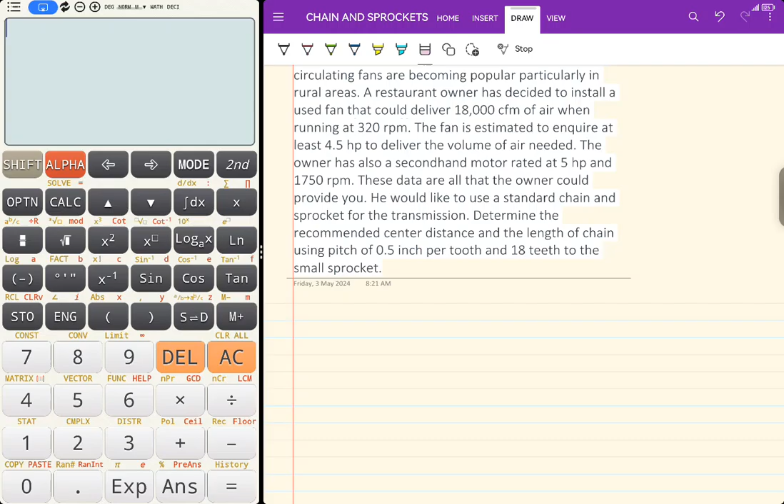So ito, sample problems for chains. So ito yung first problem. Due to high cost of electric power, ang haba ng problem na to eh. High maintenance cost and high investment of air conditioning units, air circulating fans are being popular, particularly in rural areas.

A restaurant owner has decided to install a used fan that could deliver 18,000 CFM of air when running at 320 RPM. The fan is estimated to require 4.5 HP to deliver the volume of the air needed. Ito yung mahabang problem eh. Kaya sa board exam, ginagawa nila plug-and-plug na lang. But not necessarily like that. You just need to read between the lines. Maikli lang tong problem na to.

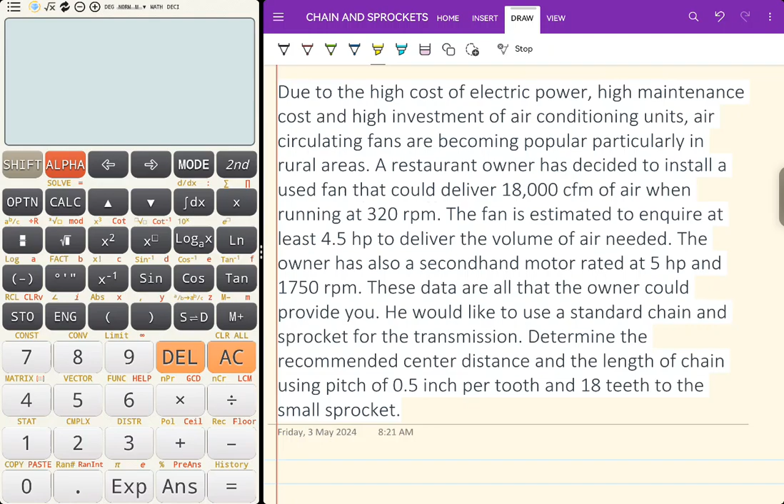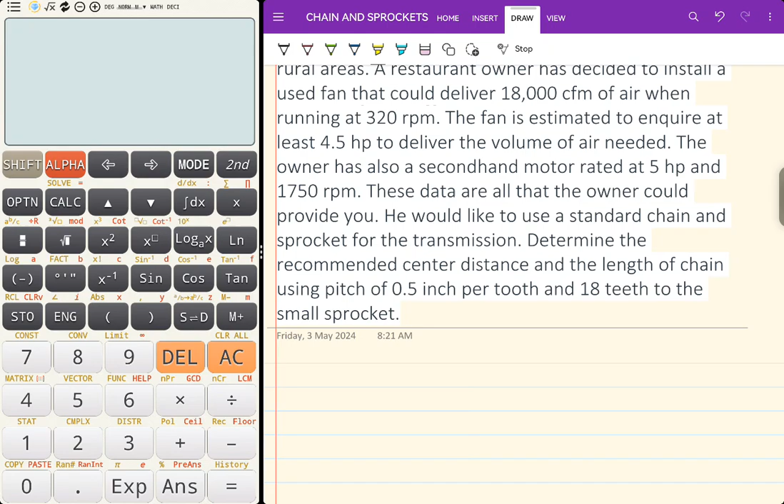So, the owner has also had a second-hand motor rated at 5 HP and 1750 RPM. So, these data are all the owner could provide you. He would like to use a standard chain and sprocket for transmission. Determine the recommended center distance, yung hinahanap. Recommended center distance. Okay. So, recommended center distance and the length of chain using pitch of, bigyan ka ng pitch dyan na 0.5 inch per tooth.

So, pitch 0.5 inch per tooth. So, yan yung gap between each chain, yung pin. Okay? Yun yung gap. So, yung driving chain mo for the small sprocket, that is 18T. Hindi siya diameter of the small sprocket. Teeth of the small sprocket, that is 18T.

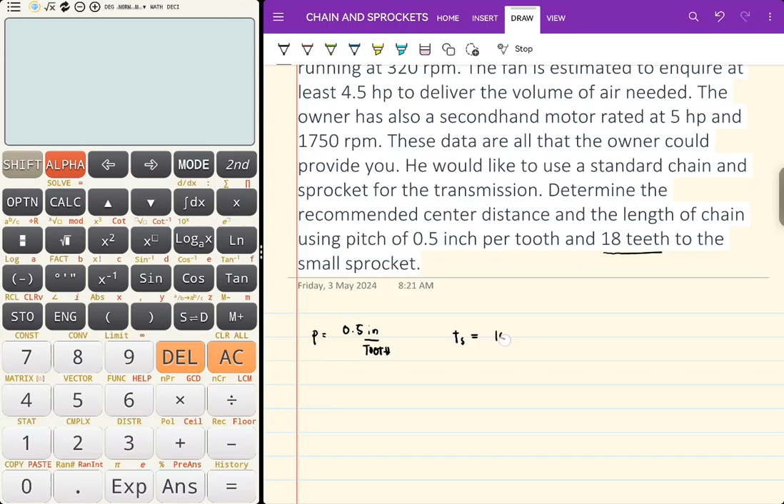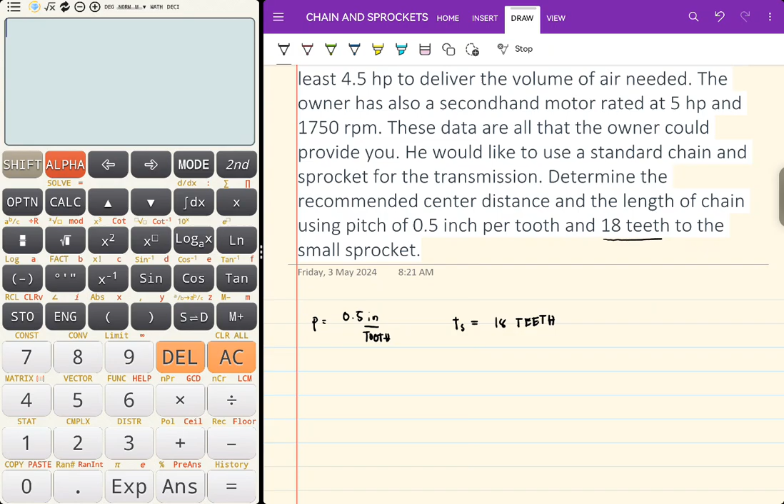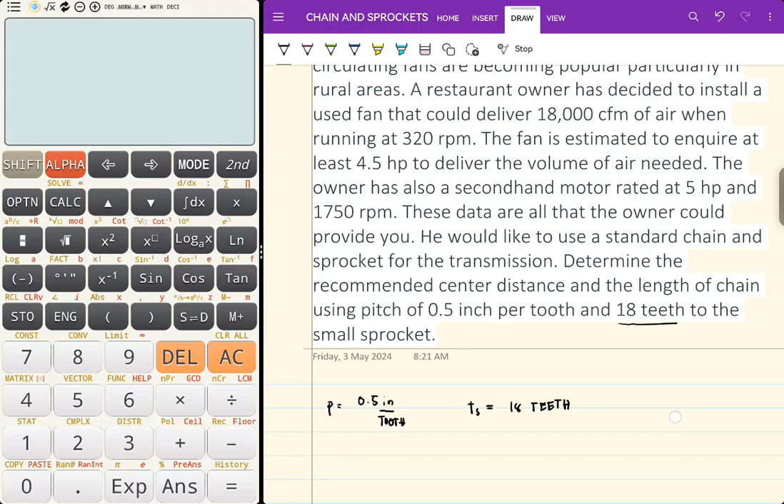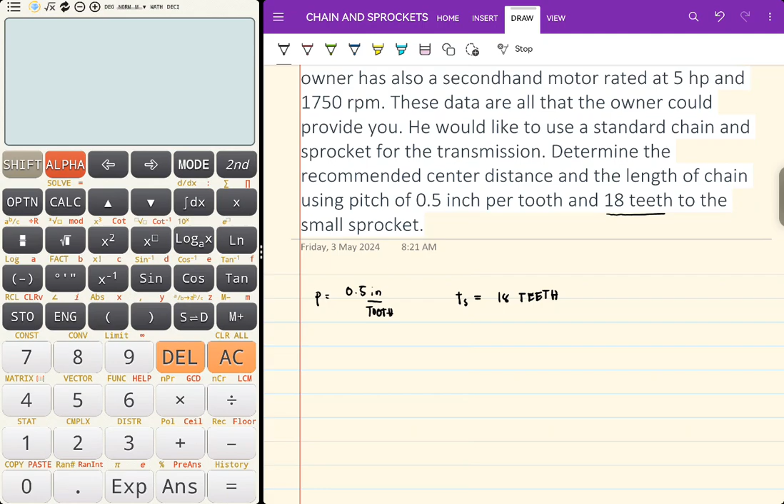Sir, paano natin mahahanap yung mga recommended natin dito? Take note of the following. Yung motor na gagamitin is 1750 RPM. Ngayon, ang kailangan mo is a fan that will run at 18,000 CFM tapos rotating at 320 RPM. So, meron tayong given dito. Always the smaller sprocket will turn more than your bigger sprocket. So, definitely, ito yung NS.

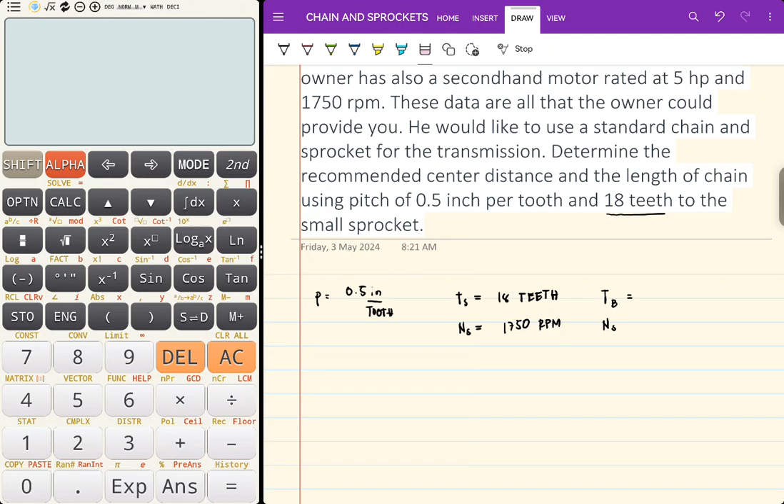The smaller sprocket, meron kang 1750 RPM. And then, wala kang teeth for the bigger sprocket, meron kang N for bigger sprocket. So, NB. This is 320 RPM. Ang hinahanap sa'yo dyan is the what? Center distance and the length of the chain. Balik tayo dito sa mga discussions natin.

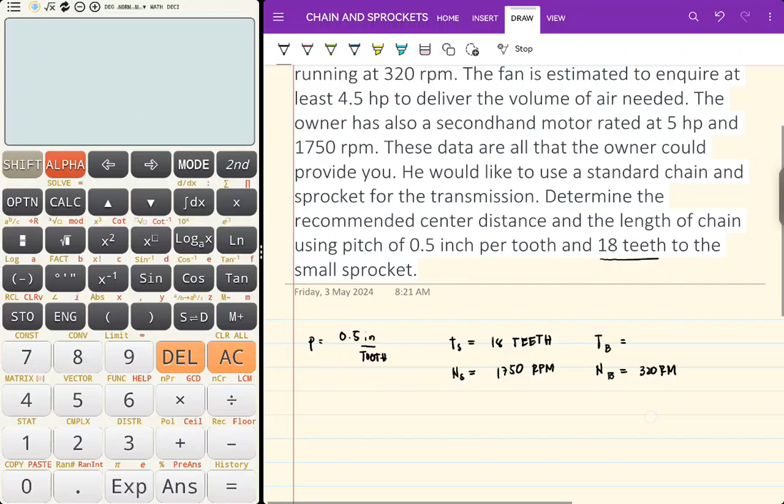Okay. Ito yung formula natin pagdating ng length of the chain. For the length, makuha mo dyan the length in pitches. So, you have to multiply it with the number of pitches. Kasi in pitches din yan. Gagamitin mo kasi yung teeth. Pag ginamit mo yung teeth, yung ngipin ng sprocket, dun sa chain, ang haba niyan is in pitches. So, inch per tooth yan. So, you need to multiply it with the number of pitches pa.

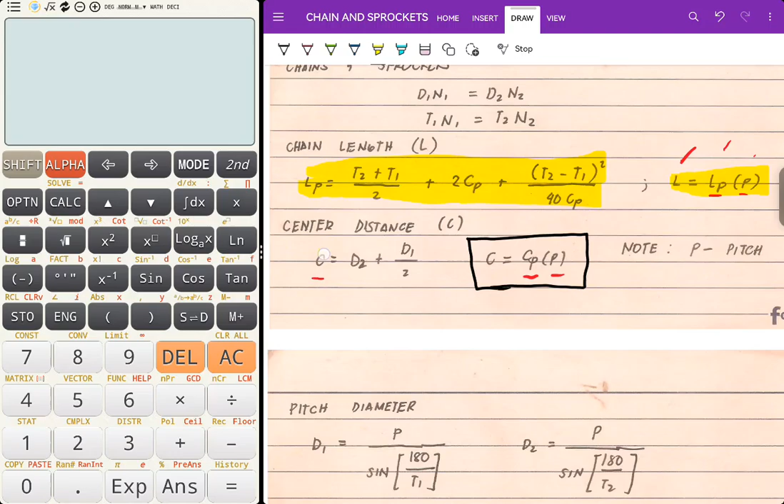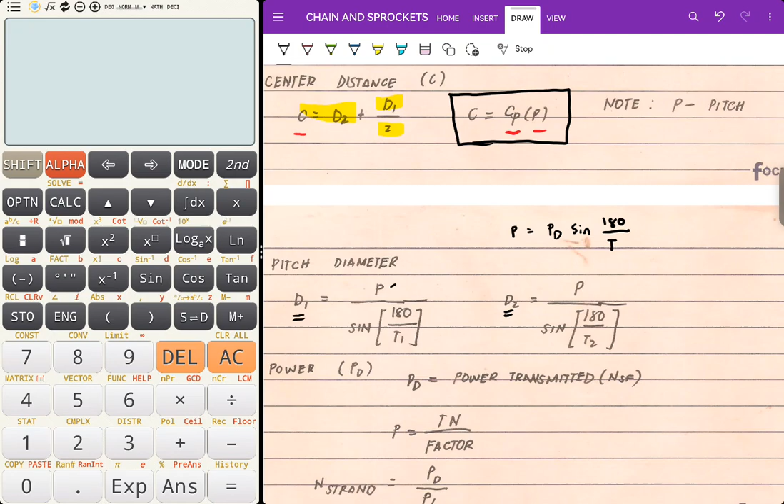Okay? So, on the center distance naman, gagamitin mo yung kanyang diameter. Diameter ang gagamitin mo dyan. Tapos, in order for you to get the pitch diameter, pitch is equal to pitch diameter multiplied to sine 180 divided by the number of teeth nung kinukunan mo ng pitch. Either the smaller diameter or the bigger diameter. So, pasok natin dito sa calculation.

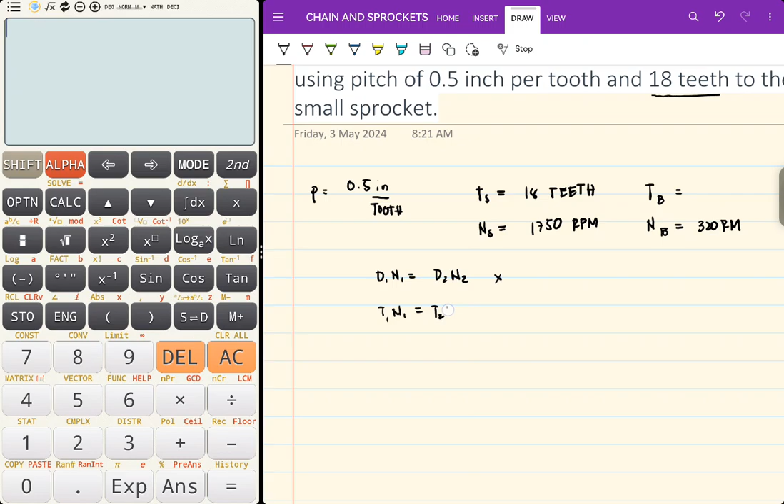Okay, first, hanapin natin yung NB. D1N1 is equal to D2N2. Pero ang pinag-uusapan natin is yung number of teeth. Kaya wag mong gagamitin ito. Ito ang gamitin mo: T1N1 is equal to T2N2. Ang hinahanap ko dyan is yung number of teeth ni 2. So, T2 is equal to T1N1 divided by N2. So, 18 teeth times N1, which is 1750 RPM, divided by 320 RPM. Cancel same units. 18 times 1750 divided by 320.

So, yung bigger sprocket mo, hindi pwedeng 98. Kasi pinag-uusapan natin dyan ngipin. Diba sa tao, ayaw mo ng bungi? Tama ba? So, 98.44 teeth. Approximately, this is 99 teeth. So, for further calculations, ang gagamitin mo dyan yung actual number. So, hanapin natin ngayon yung mga diameter nila.

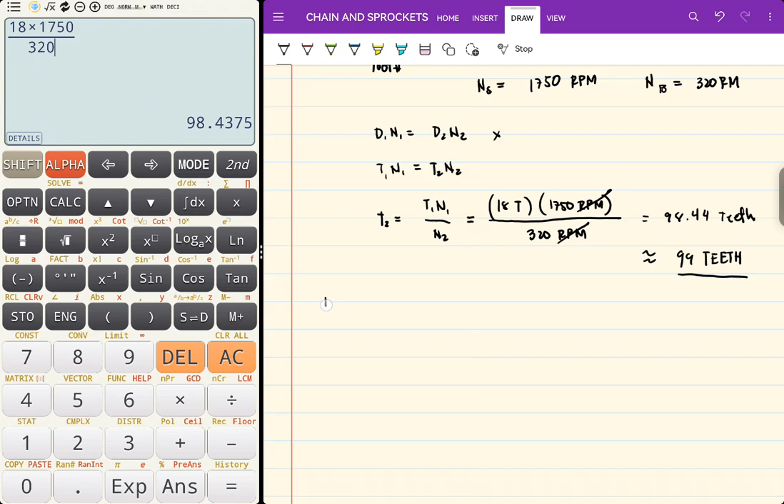The pitch diameter for the smaller sprocket will be yung pitch divided by, tandaan nyo, hindi nagbabago ang pitch, yung size lang ng sprocket. Kasi pag nagbago yung pitch, hindi na yan papasok doon sa inyong sprocket. So, this is sine 180 divided by number of teeth nung una, that is 18. So, 0.5 inch per tooth divided by sine 180 divided by 18. May tooth ka na dito sa baba, makakancel na lang yung tooth. Inch na ang lalabas dyan.

Ito, denominator. Makakancel talaga yan. Okay? So, this will become 0.5 divided by sine 180 divided by 18. So, 2.8794 inch.

Yung D2, that is, yung pitch natin, 0.5 inch per tooth, divide by sine 180 divide by 99 teeth. Okay. Uguin ko na lang yung nasa ibaba dyan. So, 99. This will become 15.7590 inch. Okay. We now know the center distance.

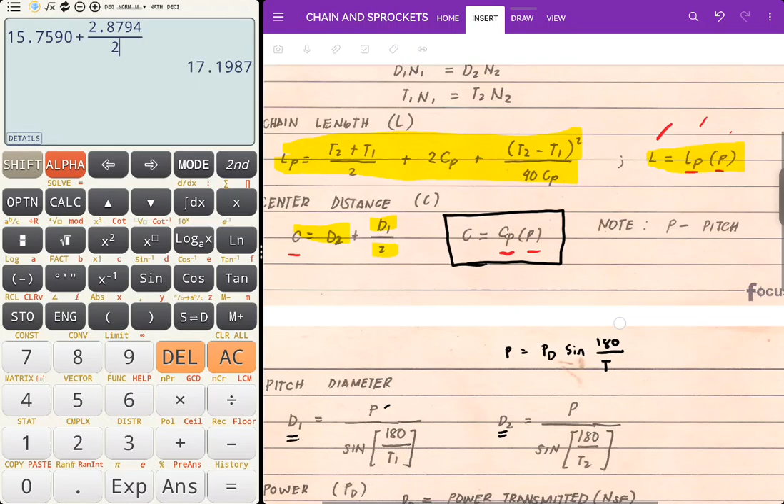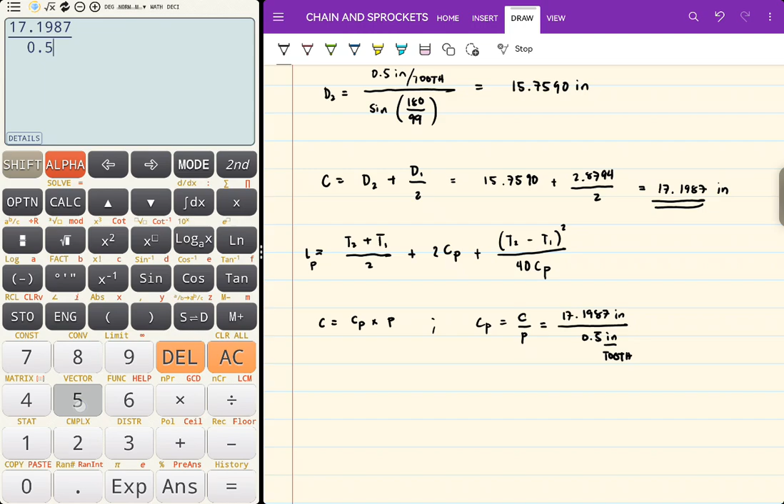Okay. Mali. Okay, na-update ko na lang yung mga turo natin. Hanapin mo muna si center distance yung may pitches. Diba, C is equal to CP times the pitch. Hanapin mo si CP, length of pitches. So, CP is equal to C over P. So, that is 17.1987 inch divided by 0.5 inch per tooth. Dapat lahat naka-teeth. So, 17.1987 divided by 0.5. This is 34.3974. Cancel yung inch tooth na to.

Eh, sir, number of teeth. Pag number of teeth, dapat yan sakto. So, gawin natin tong 35. Okay? So, for the length of the pitch, number of teeth tayo. 99 plus 18 divide by 2 plus 2 times CP mo, 35, plus 99 minus 18 squared over 40 times 35. So LP, number of teeth to lalabas. So 99 plus 18 divided by 2 plus 70.

Yan na, mag-MDAS ka na. Simplify mo na pag kaya na ma-mental. Plus 99 minus 18 squared divided by 40 times 35. So that is 133.1864. Okay? Teeth ito. Pwede na yan. Pasok ko na dito para makuha ko yung length of the chain.

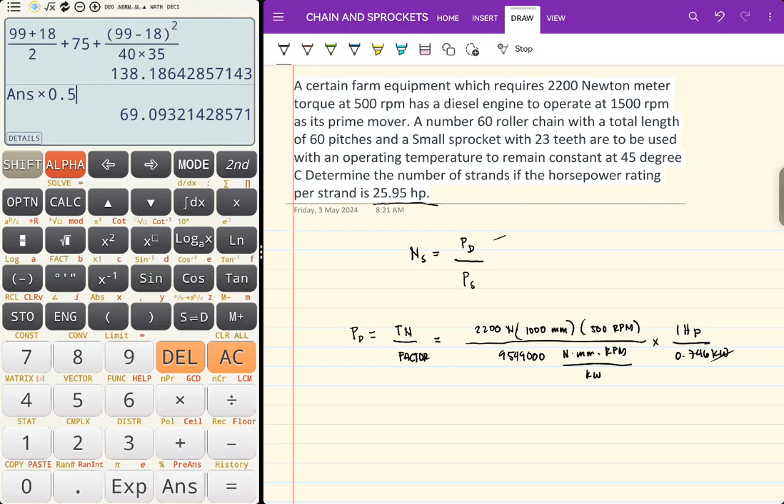Divide by 9,549,000 Newton millimeter RPM every kilowatt. Ang kailangan ko HP, times 1 HP every 0.746 kilowatts. Cancel same units: kilowatt, RPM, mm, Newton. Ang lalabas HP. So, PD.

Okay, calculate natin. 2,200 times 1,000 times 500, divide by 9,549,000, times 0.746. So, that is 154.4173 HP. Ito yung power that will be carried by

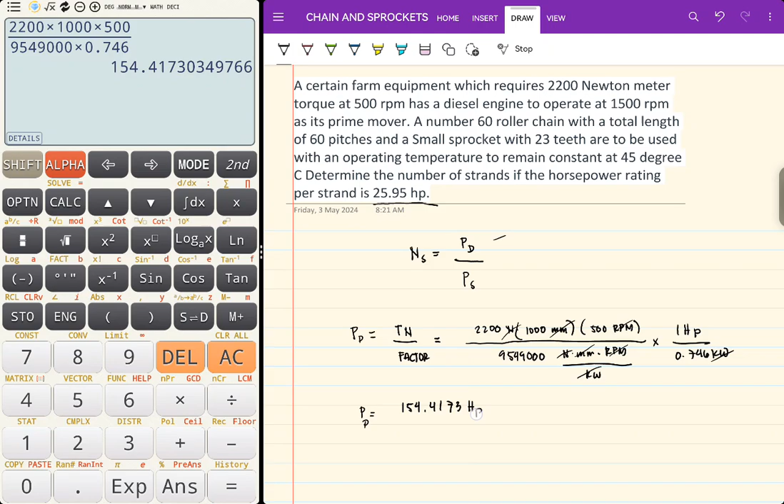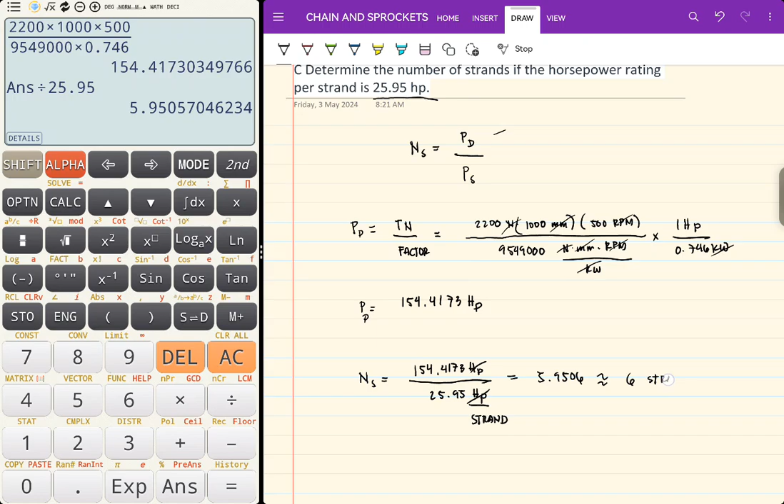the strands. Okay? So, for the number of strands na gagawin mo sa chain mo, the power developed is 154.4173 HP divided by 25.95 HP per strand. Cancel same units. So, divide natin to ng 25.95. So, ilang strands? 5.9506. Approximately 6 strands. A basic problem.

So, next problem. A 4-inch diameter shaft is driven at 3,600 RPM by a 400 HP motor. The shaft drives a 48-inch diameter chain sprocket having an output efficiency of 85%. The output force of the driving sprocket and the output power of the driven sprocket are... So hinahanap dito yung force on the driving sprocket, tapos yung output power of the driven sprocket.

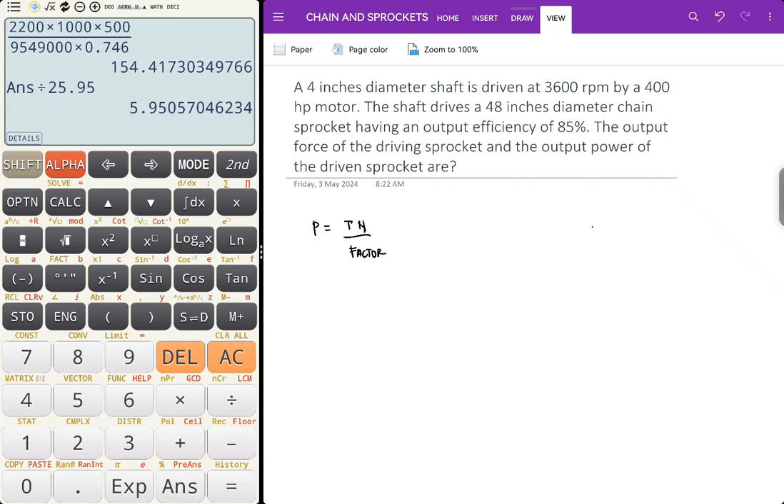So hanapin muna natin tong isa. Kailangan ko dito, meron akong N, check. Meron akong 400 HP motor. So paano yung sa driving sprocket, yung force niya? Di ba power is T N over factor? Tapos, recall nyo that your torque is equal to force times diameter nung pulley or sprocket divided by 2. So, power is equal to force times diameter nung driving pulley divided by 2 times N divided by factor.

Ang kailangan ko is the output force. The shaft drives a 48-inch diameter chain. Kaya lang, meron pa ako dito, mababawasan pa yan. May efficiency yung sprocket mo. So, the efficiency is efficiency ng sprocket. Multiply siya. So, pag transmit na 400 HP ng motor, hindi na yun yung maitatransmit ng sprocket mo. Mas mababa na, kasi meron kang efficiency.

So, force of the sprocket, that is power times factor times 2 divided by diameter ng pulley, N times efficiency ng sprocket. So, this is equal to 400 HP. Yung factor natin, 63,025 pound inch RPM every HP, times 2 divided by diameter, that is chain sprocket 48 inches.

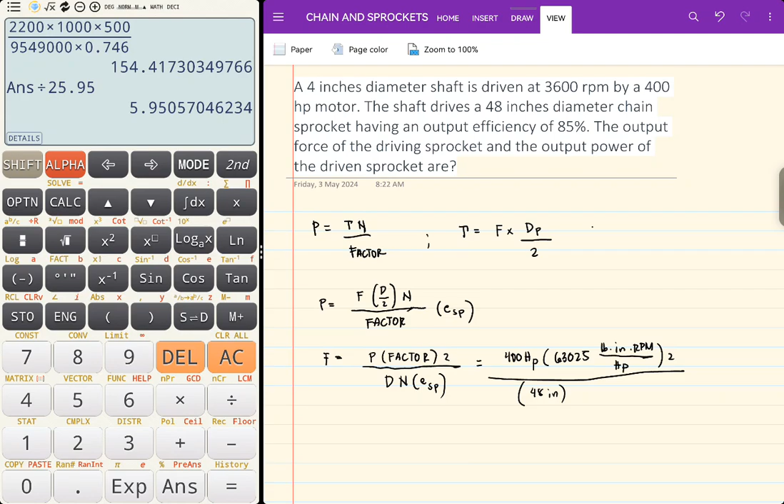Tapos N is... wala pa yung N nung sprocket mo. Bakit, sir? Tandaan nyo, ang equal lang sa kanila ay yung torque. Yung torque ng shaft is equal to the torque ng sprocket. Yun lang ang equal, pero hindi equal yung kanilang speed. May diameter ka dito ng shaft, N of the shaft, tapos meron kang diameter ng sprocket, N ng sprocket. So, hanapin mo ngayon yung N ng sprocket, kung paano siya umiikot.

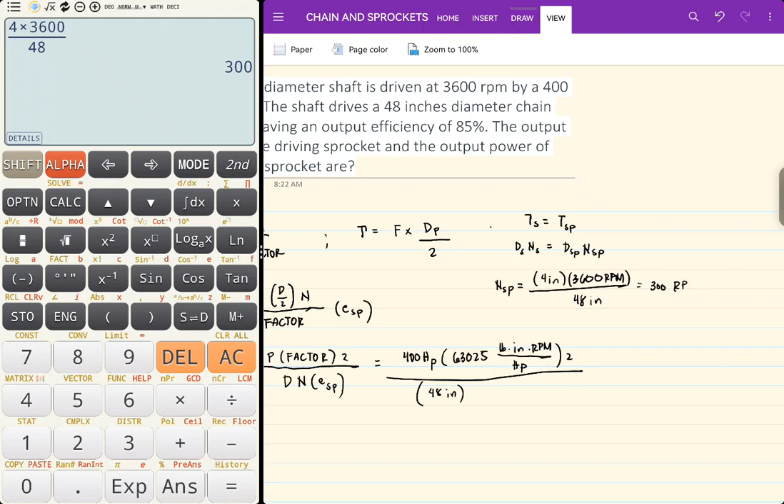So, N of the sprocket is equal to diameter ng shaft, which is 4 inch, times N ng shaft, which is 3,600 RPM, over 48 inch. So, 4 times 3,600 divided by 48. So, 300 to. 300 RPM. Okay? So, this is 300 RPM.

Tapos, yung sa sprocket, 0.85, efficiency niya yan. So, makuha natin yung force. That is 400 HP times 63,025 times 2, over 48 times 300 times 0.85. So, yung force dyan is 4,119.2810 pounds. Force to.

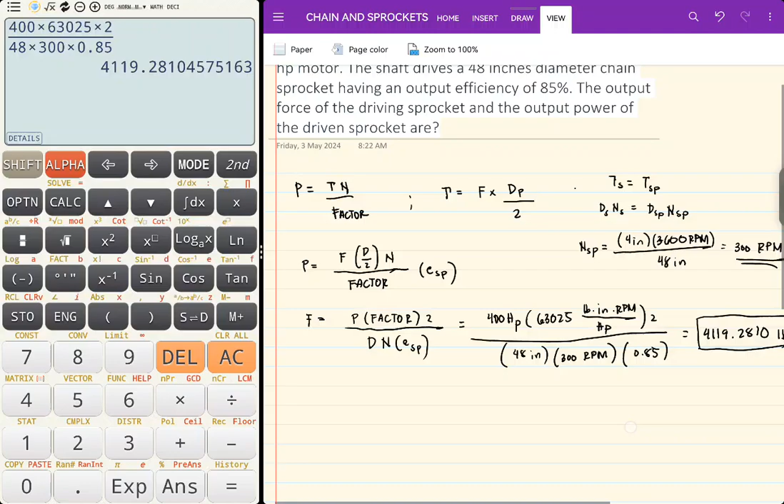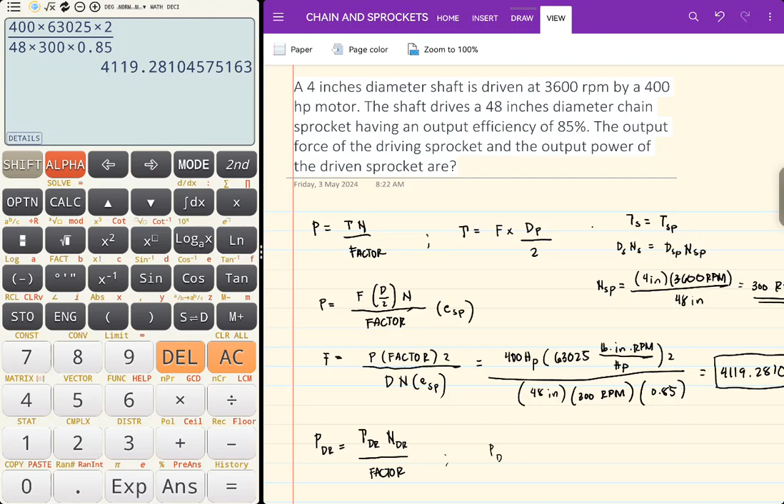Now, yung output power of the driven sprocket. Ano naman yun? Yung power of the driven sprocket is equal to the torque of the driven sprocket times N of the driven sprocket, divided by factor. Now, yung power, meron akong torque. Same lang naman yung torque ng shaft. Siguro ang tinatanong dito, wala naman na driven sprocket dito. So, ito na mismo. So, the torque is same.

Bale, kukunin natin yung torque from the force. So, 4,119.2810, this is pounds, tapos 48 inch, times yung N. Ano yung N nakuha natin? 300 RPM. Divide by 63,025 inch pound RPM per HP. Sir, nasaan yung 85%? Ginamit ko na po dito, hindi nyo na kailangan gamitin. Ibig sabihin yun na yung actual force.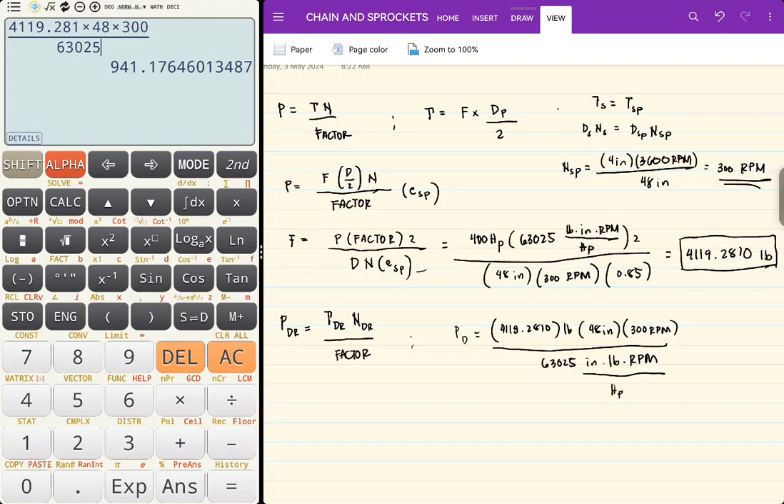4,119.281 times 48 times 300, divide by 63,025. Para ma-check nyo, dapat mas mababa. 48 inch. At mas mataas siya. Dapat mas mababa nga yan. 400 HP. Tama naman.

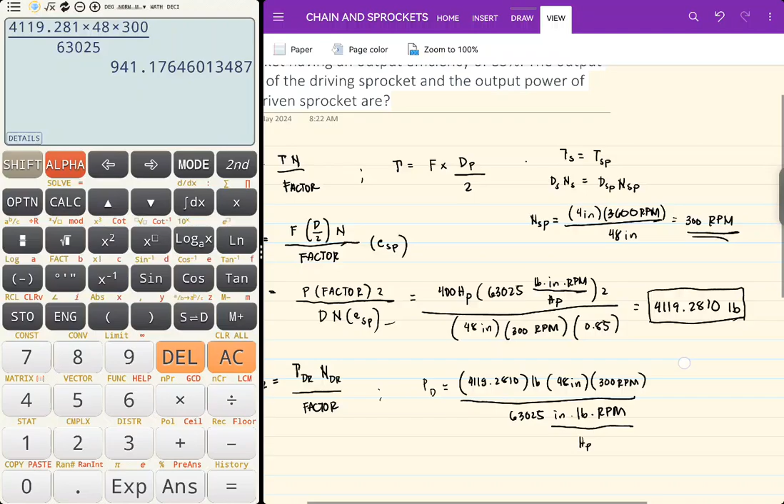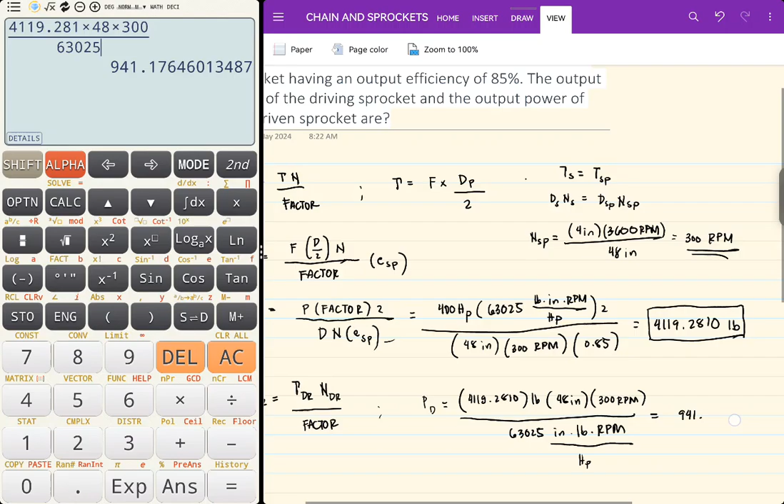Anyway, 941 point... Ay, divide by 2 pala. Wala akong divide by 2. So, F times itong 48 inch, divide by 2. So, 470. Ayan, same lang, di ba? Kapag in-applyan natin, 400 HP rin.

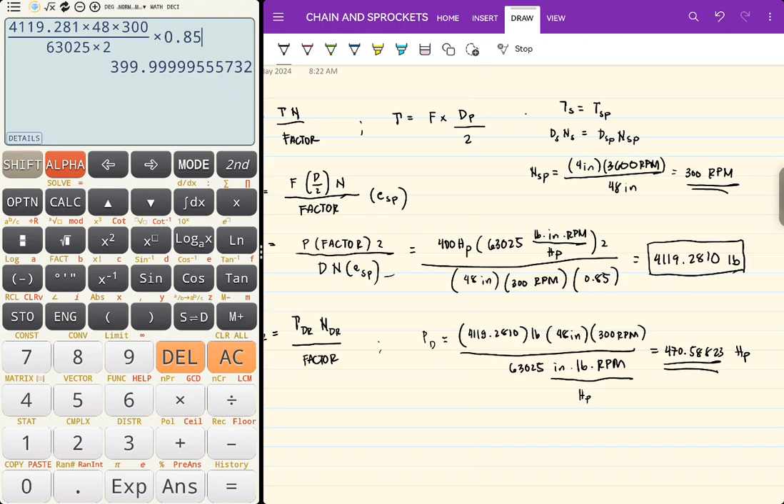Yung 0.85. So, ano yung nauna? Tanggalan natin ito. 470.58823. Pag minultiply mo ng 0.85, same lang sila, 400 HP rin. Okay? So that is for part 1.